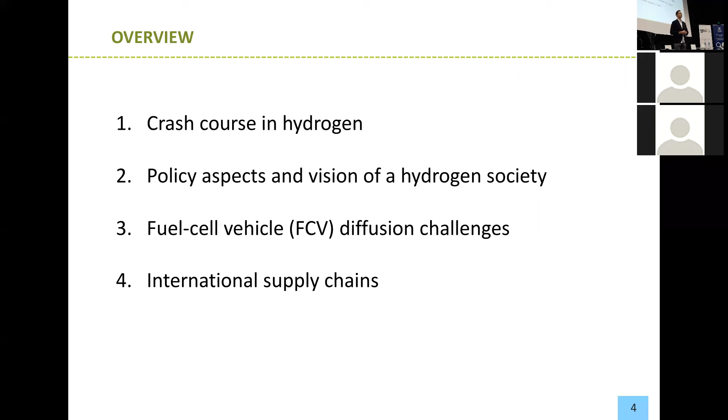So let's get started with the first slide. I'm just going to ask if it's possible for the engineer to maybe look at dimming the front lights, if that's possible.

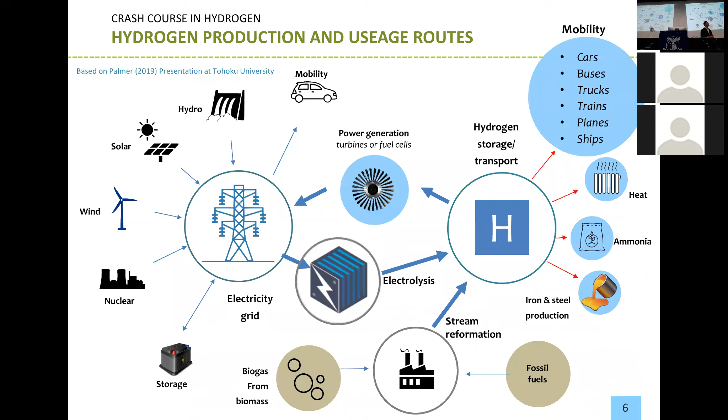There are a lot of countries taking an interest in this topic now. Japan is one of them, but Germany is also a big one really looking at renewables production for hydrogen, and China has also come on board recently. So that's the crash course in hydrogen over.

Let's jump now into the discussion of Japanese energy policy. The first thing to know is that energy policy in Japan is very centralized and very top down. The people who make energy policy are not the Ministry of Environment, but the Ministry of Economy, Trade and Industry. Their foremost interest is to further the development of Japanese industry.

These are government bureaucrats, and they operate basically at arm's length from the Prime Minister. So if the Prime Minister changes in Japan, which it frequently does, that doesn't mean energy policy gets reversed and has to start from zero again. There's a remarkable amount of continuity in Japan regarding the narratives and the actual direction of energy policy.

Because it survived some changes, Prime Minister, it's able to be very continuous. And we also have a very distinctly pro-coal and pro-nuclear flavor to the energy policy in Japan. There are many reasons for that, but that's just how it is for now, without making a judgment on that.

It's also this policy-making environment where the bureaucrats are sort of running the show, and then giving their energy policy to the Prime Minister or the Cabinet, who will typically stamp that. Rarely would there be intervention from a Prime Minister coming in saying, I'm going to bring about a greenhouse gas emissions cut by 50% by the year X, and you are going to make a policy to reflect that. It's not really how it works in Japan.

Also, METI has quite a strong relationship with utilities and with heavy industry. And so that's being blamed for the delay in widespread renewable diffusion in Japan.

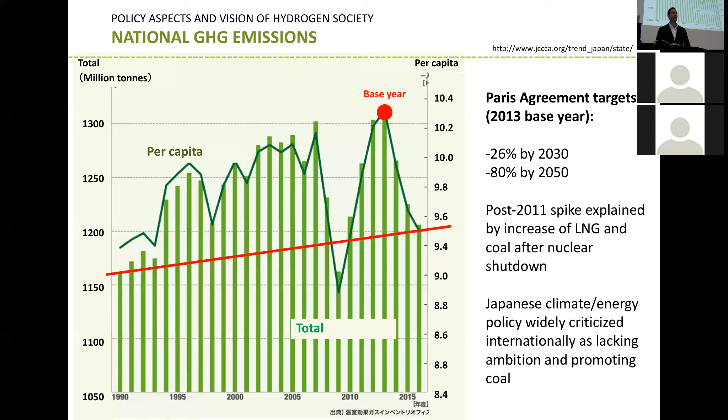But what's happened after Fukushima, all the nuclear got switched off. We've had an increase in coal, which explains the increase in greenhouse gas emissions, and we've had a big increase in liquid natural gas - it's very expensive to import into Japan. We've also had a big explosion in renewables, but that's basically just solar in Japan. We have a big delay in wind, even though Japan, like a lot of countries, has good wind potential.

That's shaped by historical experience, where during the 1970s Japan twice suffered the so-called oil shocks. Their electricity generation was almost 70, 80, 90% coming from oil, and all of a sudden they had difficulties importing oil into Japan, so they weren't able to create electricity. That showed them the problem of depending on one particular region, the Middle East, and one particular fuel source, oil. So their strategy for energy is characterized by diversity.

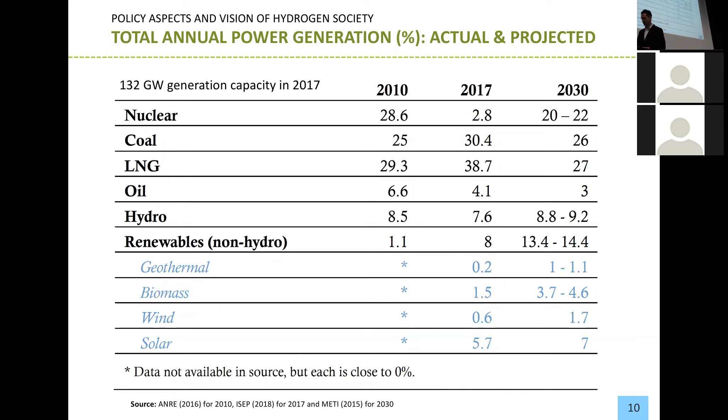First, the idea is to work with existing technologies. That involves fuel cell vehicles, FCVs, and stationary fuel cells, which are basically fuel cells that do cogeneration—they create heat, typically converted to hot water, and they create electricity. These are generally concentrated in the residential sector right now. So phase 1 is to start with these existing technologies to get them out in the market, because selling as many fuel cells as possible helps drive down costs and build up economies of scale. To get these cars out on the road, we also need to create fueling stations.

While this is happening, the second stage is much more ambitious, and this involves R&D—this is where the Latrobe Valley project would fit into all of this. The idea is to start looking at creating lots of hydrogen from overseas resources, mass-produced from cheap resources. And the idea is that when we eventually move into the commercialization phase, around 2030, we use hydrogen not only in the mobility sector but also in the power plant sector.

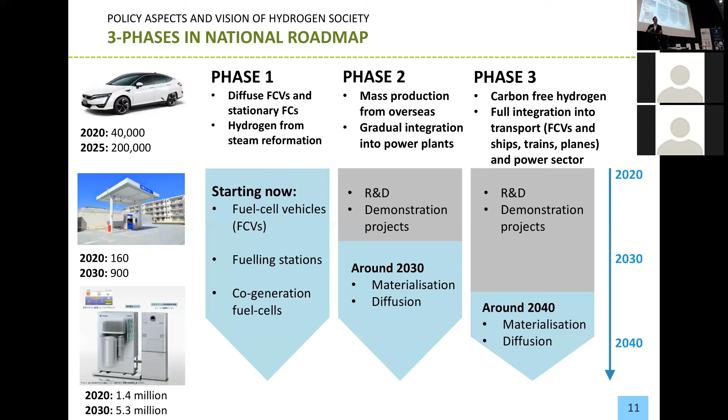So that's the general approach. In phase 3, the idea is to make sure all this hydrogen is carbon-free, which involves, if working with fossil fuels, carbon capture and storage, CCS. Then the idea is to move this hydrogen into not only forklifts, vehicles, and buses, as is the present focus, but increasingly ships, trains, and completely replace natural gas generation in the power sector. These research and development projects have already started, and the Latrobe Valley, to repeat myself, is part of this phase 2 move, with an eye on phase 3, where that Latrobe Valley coal would have CCS and deliver huge amounts of carbon-free hydrogen to Japan.

Now there are some very specific diffusion targets linked to this roadmap. Concentrating just on mobility, for example, the idea is by the time the Olympics are in town, to have 40,000 of these on the road. These are not annual targets, they're cumulative sales. To put it in perspective, there are currently 62 million internal combustion engine vehicles in Japan, which is half the population—basically 1 out of every 2 people has a car.

The idea is to get 40,000 of these on the roads, then move up to 200,000 by 2025, and in the future replace all internal combustion engines with either EVs or hydrogen. This is a very, very ambitious target.

Toyota, with their present Mirai, only has a very limited capacity. They're moving, I think next year, to be able to make about 3,000 per year. But to achieve this target of 40,000 vehicles on the roads is probably not going to be possible.

It's probably overambitious. What's more realistic is actually to have... I'm sorry, don't you really hate it when you make a mistake in front of like 200 people in your slides? This target should read 160 by 2020. So I'm sorry, I'm looking at buses, aren't I? I'm sorry, so this is correct, yes.

So buses are also a part of this, and buses obviously consume much more hydrogen than vehicles ever would. These are already moving onto the roads, and the idea is that, again in the far future, to replace our current bus fleets. Forklifts are also a part of this, but fueling stations really are key to all this. Without a fueling station we can't have fuel cell vehicles, because they have to get their fuel from somewhere. So these are just targets.

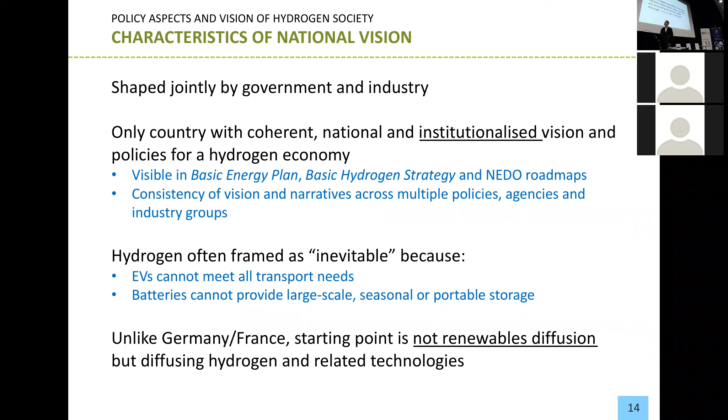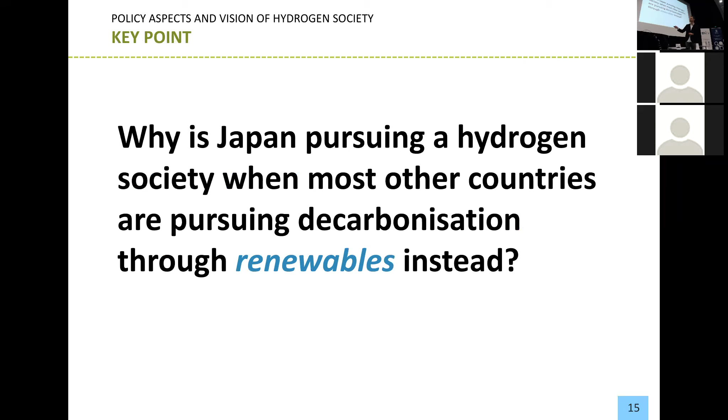Whereas Japan is more so the opposite - we want to get to a hydrogen society, how do we get there? Renewables is one way, but so is fossil fuels. That's a big difference. So a lot of people might be saying, okay, so hydrogen is being pursued in Japan - why are other countries doing hydrogen? And why isn't Japan pursuing decarbonization through renewables, like Germany did in the early stages?

There are lots of reasons for this, but basically Japan's utilities and equipment manufacturers really lack competitiveness in renewables, no matter what sort of propaganda you might hear when you live over there. That's why, for example, Mitsubishi Heavy Industries partnered up with Vestas, the overseas wind experts - that's what they have to do now to compete in the global renewable energy markets.

Japan also has a very long history, starting back from the 1960s and 70s, investing public funds in R&D, in fuel cell development. They've been the world leaders for several decades in terms of the scale of public investment, the sales of technology, and the patents. There's also widespread awareness of export, especially supply chains, international supply chains for hydrogen.

Most importantly - it's difficult to produce evidence for this claim, but I've heard this in many conversations with people all over Japan - Honda, Nissan, and Toyota are very concerned about the shift to EVs, because the problem with EVs, as you know, is it's a game changer. We can have companies in Silicon Valley, companies in China producing EVs that are probably going to be even better quality than our established incumbent car manufacturers. What are these car manufacturers going to do? We have to protect them because, as we know, like all big industries, people's livelihoods and jobs depend on this. So the strategy in Japan has been to really look at hydrogen fuel cell vehicles as being a response to this rising EV market across the world.

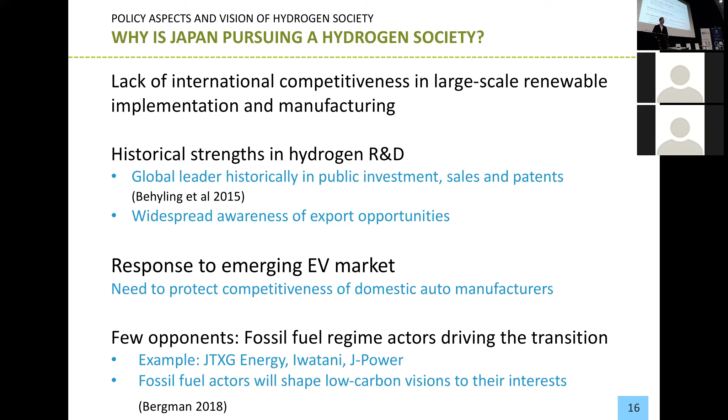And you walk around the suburbs in Japan, you're going to find these Ene-Farms. These are cogeneration fuel cell units on the side of houses. This is taking natural gas and reforming that and creating hydrogen, then putting that into a fuel cell. You have a byproduct of heat, which is used for hot water, and electricity that goes into the house. It's only a very small output - I think it's like 700 watts, 0.7 kilowatts. Very small, but these are there.

One of the reasons is how expensive these buses are - $1 million. I'm not sure how much a conventional bus costs today, I guess even a good bus surely would not be more than $200,000. I don't know, I'm sorry. But a hydrogen fuel cell bus is $1 million, made by Toyota, made by one of the smaller companies. $1 million just sounds crazy. But when I had a conversation with a colleague, she said, Greg, when the fuel cell vehicles first came out, they were $1 million. It's remarkable that the prices have dropped down now to like $50,000. You can now buy a bus for $1 million.

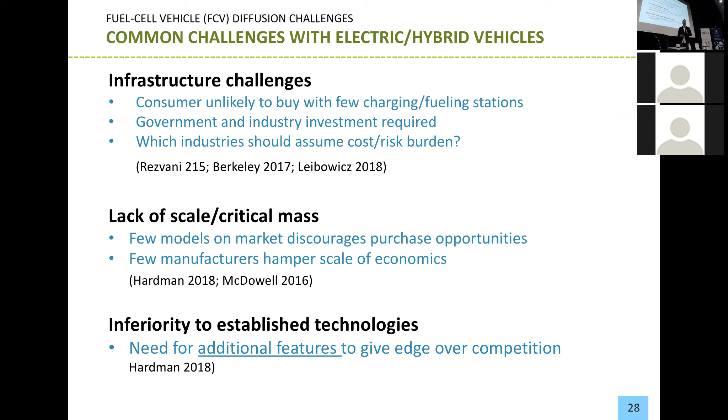So first of all, the idea is that in Japan, they're going to reduce the risks for the infrastructure rollout, for the hydrogen fueling stations, by huge government subsidies. The government's basically going to pay whoever builds a hydrogen fueling station about half of the construction costs. The construction costs are about 5 times the price of a gasoline station.

The idea is that construction costs will be covered, but so would operation costs, because right now all of the 100 fueling stations across the country are basically running at a loss. That's one approach. The other one is to share the risks across the industry.

We have the vehicle manufacturers, Toyota, Nissan, and Honda, who are the car makers, partnering with the fossil fuel companies, which are the people that sell liquid hydrocarbons or gases, and that make the fueling stations. So we're getting a partnership occurring here. What we're doing is having the car manufacturers paying these guys with the government subsidies to build and operate their hydrogen fueling stations. This is the way that risk and economic burdens are shared across industry.

I want to draw your attention here to the fact that these guys really are part of the fossil fuel regime. These are very big names in oil companies, etc.

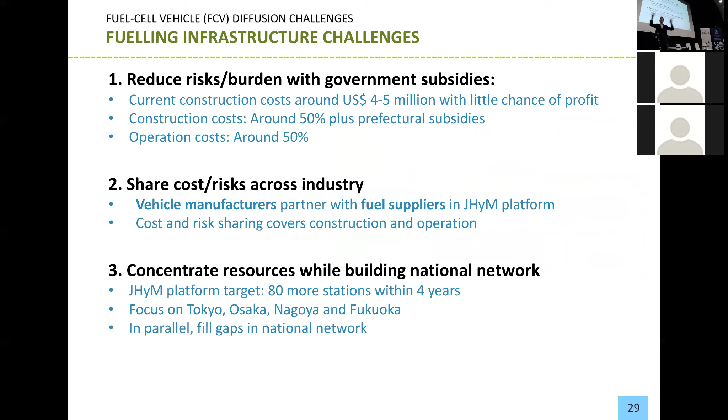The other approach is that we're also looking at concentrating our resources. First of all, we have to get lots of fueling stations out there, but also Germany apparently made a mistake when they were trying to use compressed natural gas vehicles. They put these fueling stations everywhere, evenly all over the country, instead of concentrating them where we expect the users to be.

So Japan's approach has been, yes, we need to get one in every single prefecture in the country, but really we want to concentrate on Tokyo, on Nagoya, because that's close to the Toyota factory, Osaka, and Fukuoka. Right now we've got about 40% of the fueling stations around Tokyo, which makes sense since that's where everyone's concentrated. But also for psychological reasons, the idea is to fill up every single white gap on the map—have a fueling station in every prefecture, whether or not someone's using it.

That's one approach to rolling out infrastructure. Another approach is regarding the critical mass challenge—we need to have lots of people making these vehicles.

Toyota actually opened up their patents and allowed anyone who enters into an agreement with them to use their fuel cell stack, hydrogen tank, and fueling infrastructure patents royalty-free for 5 years. The idea is to entice other car manufacturers to save costs and produce a fuel cell vehicle, bringing it to market both domestically and internationally. Apparently this just copies the approach of Tesla vehicles. This is another approach.

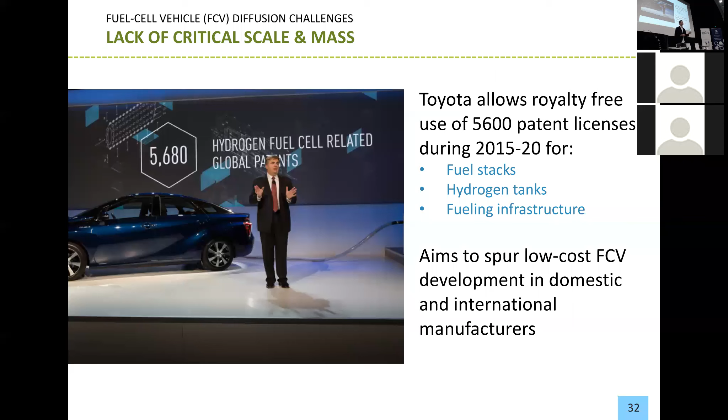Whether or not this has been successful remains to be seen, but everybody's waiting on Nissan to release their fuel cell vehicle, because as you've seen, they're part of these car manufacturers, even though they haven't released it yet, but we have to assume they will.

In terms of mileage, FCVs are by far superior, basically double that of an EV. In theory it's easy to increase—we just have to add more tanks on board, we don't have to add more heavy batteries. The government and industry have already set a target of getting vehicles with 1,000-kilometer range. Why would you need that much? I don't know, but that will be important, especially for trucks, etc.

When it comes to charging time, we know that EVs take a long time, even at turbo. FCVs are just the same as the gasoline fueling-up process.

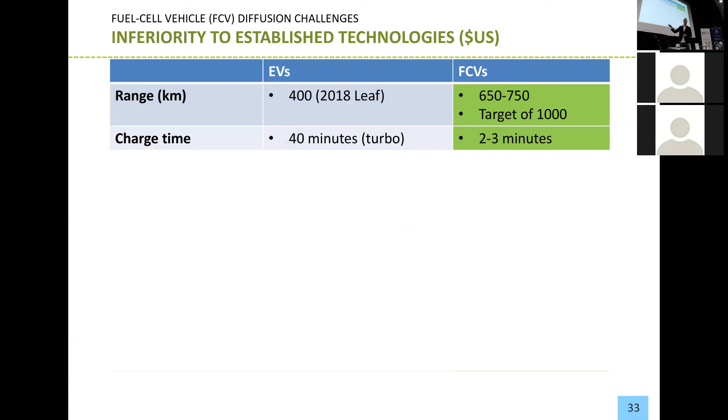And also our fuel costs—we know that right now EVs have an all-you-can-charge plan in Japan that's only about $18 per month, and wherever you go you can get this. So this is the big area where FCVs are actually inferior to EVs.

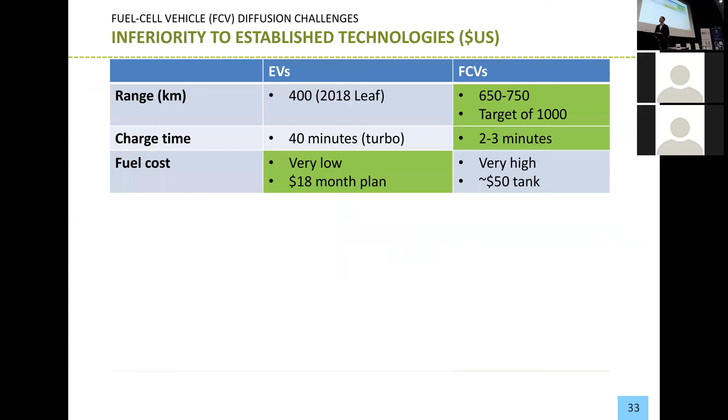This is a really important topic, running costs. For purchase costs, EVs are much cheaper, but actually FCVs are being privileged by the government with a much larger subsidy, and this allows them to catch up there. Home charging, though, is not possible with an FCV—there's a big problem there.

We have the fueling infrastructure. We have 30,000 chargers all across Japan right now, but we don't have that particular numbers for FCVs. That's another big challenge, psychological challenge at least.

And then just another thing is cold weather. So batteries, as you know, are very weak in cold weather, but FCVs actually there's no problem there. And also deterioration. Batteries, like laptops, lithium ion, deteriorate very rapidly, whereas an FCV won't.

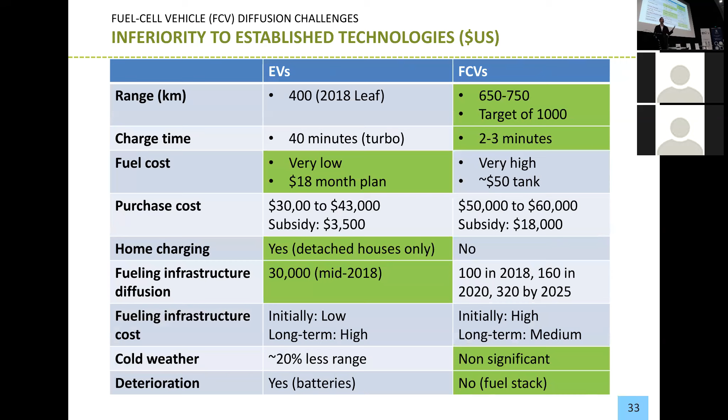So there's kind of strengths and trade-offs, but one thing that Japan's done is actually use this idea of emergency power, electricity. And this is ridiculous, actually. It costs about $10,000 to purchase this additional piece of equipment. But the idea is that if there was a blackout, which is frequent in Japan because of earthquakes, you could, if the tank was full, power your home for a few days, if you had made an investment of $10,000 to back it up.

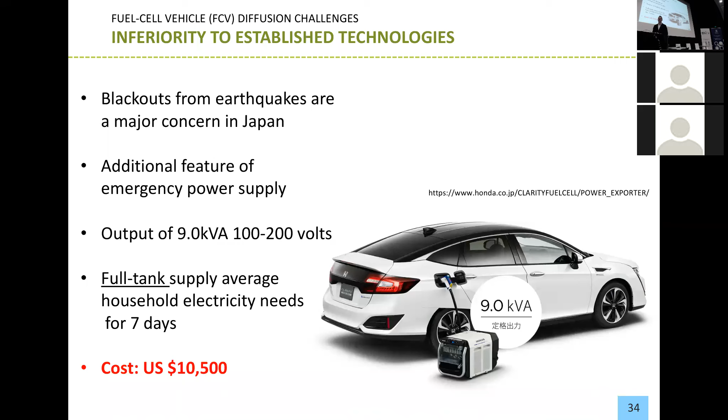So these are just the concluding unresolved challenges for FCVs, which is a really key part of the hydrogen transition: basically the lack of fueling stations and upfront costs is what everyone emphasizes. Everyone's concentrating on addressing these challenges, but actually there are other underemphasized challenges which include the running costs of FCVs and also the inconveniences that would be posed even by having 160 fueling stations.

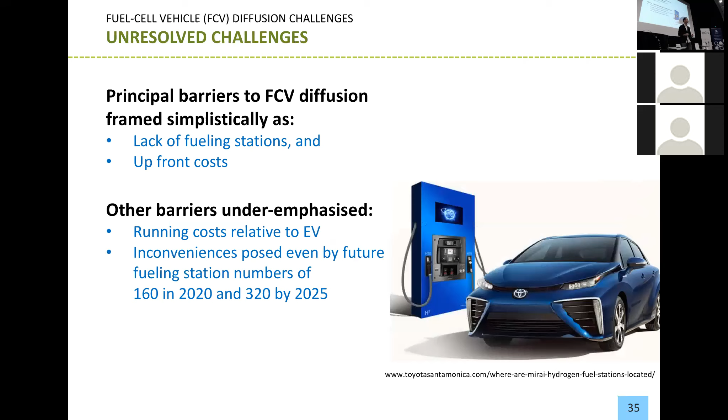So this brings me to the last part of the talk, and I know I've hit time up, so I just have to quickly look over here and negotiate. Do you think it might be possible to get around 5 minutes? Really? Fantastic, thanks very much. So I think this is probably where a lot of the interest in this room is, and I hope I'm not talking too fast for you. I'm getting a pretty dry throat here, but I'm just going to keep soldiering along.

So, international supply chains. I think we might skip this because of time, but by the way, all of my slides, on the very last slide of my presentation, there's going to be a URL. If you're interested in downloading these slides, you can, but please just wait until the end. Everyone will have a chance to download the slides if you're interested. But basically in Japan,

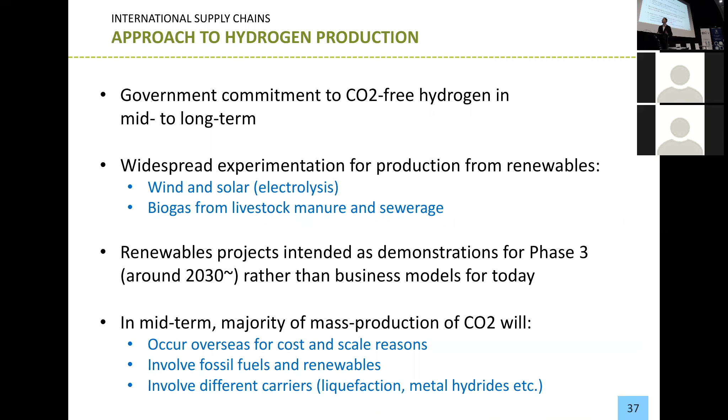there's lots of experimentation occurring right now to produce hydrogen from renewables. I'm just going to showcase very rapidly 3 examples. One is using sewage sludge. There's already a big project in Fukuoka that takes sewage sludge, produces methane gas, biogas, then converts that to hydrogen. Another project does this from livestock.

This is dairy country in Hokkaido in the north, and they take cow manure and cow urine, which is very smelly, and they make biogas, same process, create hydrogen. The other project, which I mentioned, which is in Fukushima, is using electrolysis to make hydrogen.

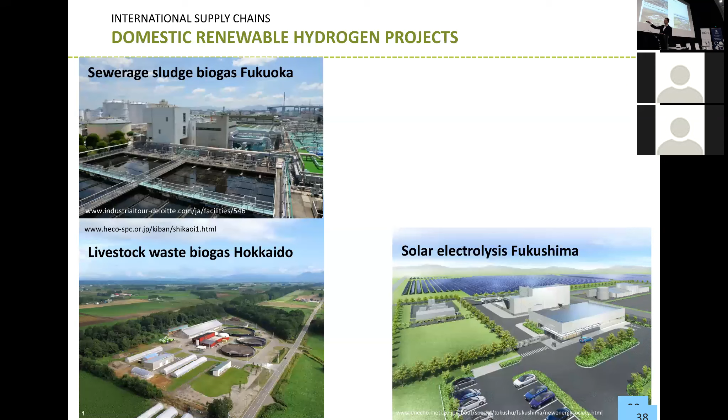Now, this is all kind of nice, but there's lots and lots of challenges to this. For example, renewables are well known to be very expensive in Japan, and these resources are very far from the cities, except for sewage, which is located in urban centers. The production, everyone knows it's technically possible, but the problem is that the demand for hydrogen today is low. So even though this is the ideal, in the future we want to have domestic renewable sources producing hydrogen, the idea is this is expensive.

It just makes more sense, for example, to use electricity as electricity, or to use methane gas from a biodigester as methane gas instead of converting it to hydrogen, especially when there's low demand today. So it's technically possible, but not really economically possible.

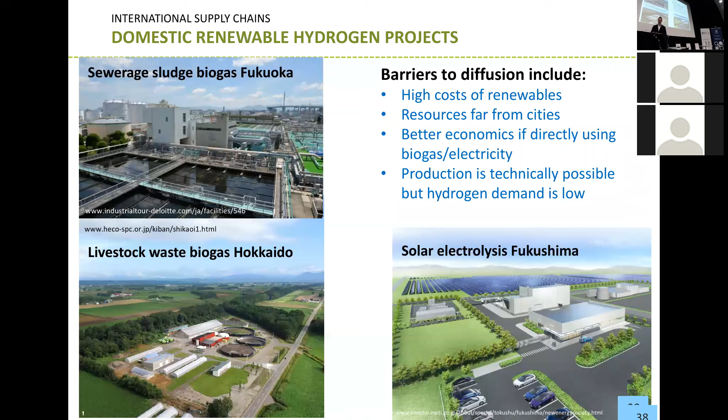So Japan's approach is to build international supply chains in the midterm. Australia's the topic of one of these. But I just want to point out to everyone that not only is Latrobe Valley the topic of much interest for Japan, actually Brunei, this little country off the edge of Malaysia, who also has these fossil fuel reserves, is actually the target of a very similar project.

And actually they're looking at using a different carrier, so not liquefaction, but actually using organic hydride to transport hydrogen to Japan. And just like Latrobe Valley, they're also looking at creating a pilot project, beginning with about 210 tons in 2020. There are very different companies involved: we have Chiyoda Corporation, involved together with Mitsubishi Corporation and Mitsui Corporation. These are fossil fuel players, these two guys.

And then it's very similar to over here. We've got some fossil fuel companies here involved in the Latrobe Valley project. But the Latrobe Valley project, just to put it in context for you all, isn't the only fossil fuel supply chain under investigation right now.

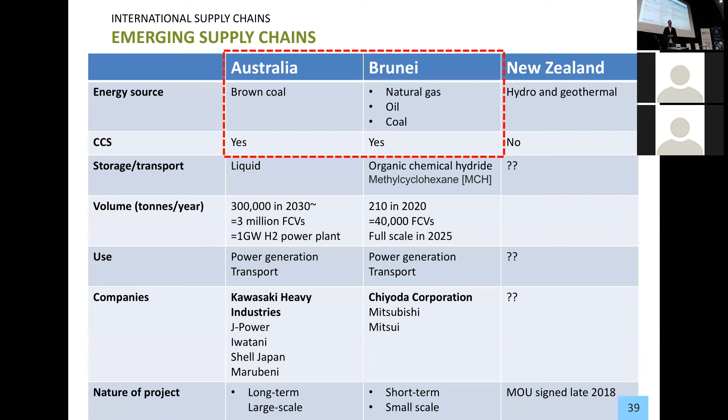We have this Brunei one, and also at the same time, apparently Japan has just entered into an MOU with New Zealand because they have lots of geothermal and hydroelectricity resources that could be used to create carbon-free hydrogen. So there's just a little map here which shows you the thinking that's actually going on right now.

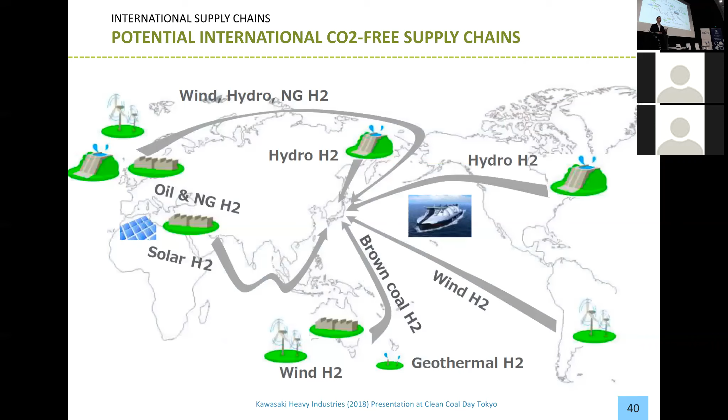So the idea is, as far as Kawasaki wants to see this, they want to see lots of international supply chains built because they build the ships to go with this. They can make lots of money by getting lots of these supply chains built.

So I'm sure most of you are familiar with this, but the idea in Victoria is to take the very cheap, accessible brown coal and convert that to hydrogen via gasification first, and then to put that on this specially purpose-built tanker, which would carry it in a liquefied state to Japan.

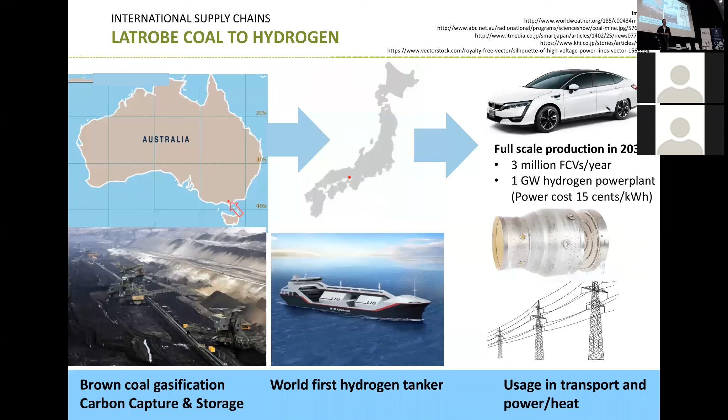And not only would that be used for transport, the idea is to bring it into the power plant sector, as I keep explaining, because the power plant sector has the potential to create a huge demand for hydrogen and to lower the costs for the FCVs. The idea is to create a synergy here.

So Kawasaki Heavy Industries argued that to achieve the same sort of level of output in the future, we have to be looking at creating a 3 gigawatt solar array. There are very few of these in the world, by the way.

So a lot of people are skeptical of the carbon capture and storage, right? And a lot of people are thinking, so far there's no real projects in the world that use CCS for climate mitigation purposes. Why would we expect to see this happen in Latrobe Valley? People are worried that it's going to go ahead without CCS.

And the pilot project will go ahead without CCS, based on my understanding. So if CCS is incorporated into Latrobe Valley, that would be when the project is commercialized, if it's commercialized, which there's no decision on yet.

But I want to make a point about this. First of all, the CCS costs, according to Kawasaki Heavy Industries, only make up about 10% of the costs. They've got a target of trying to get about 30 yen per cubic meter of hydrogen. This is a 2030 kind of target. It's roughly comparable with natural gas.

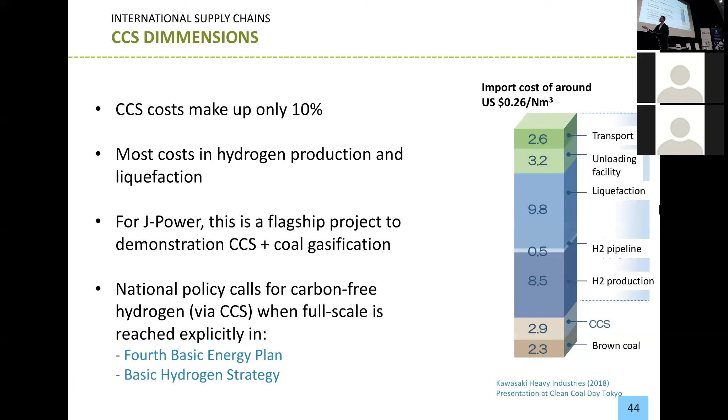There's also a great Australian researcher working out of Kyushu University who's made a very detailed analysis of the cost considerations of the Latrobe Valley project and compared it to renewables. He's come to the conclusion that today, coal would be much cheaper, even with CCS, for producing large amounts of hydrogen. But in the future, that's going to be challenged by declining costs in renewables.

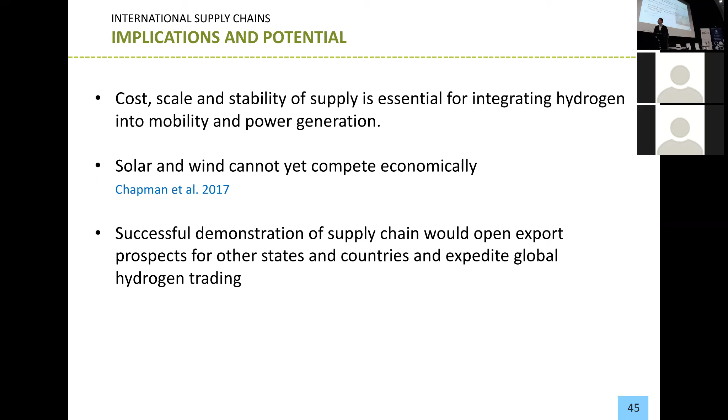So I went to the Latrobe Valley, just came back this morning, and had a few conversations down there. I met with some residents. Not everyone in the Latrobe Valley is super excited about this project, because the Latrobe Valley is an area that's been subject to environmental pollution for decades because of the coal industry.

So we've got some residents down there who are very concerned about the environmental impacts, even of a pilot project. Their concerns, first of all—I haven't been able to verify if this is true or not—is their claim that there hasn't been an environmental impact assessment on this project because it's a pilot project. They're also concerned about air pollution from the coal gasification and any waste left over in the process, because the raw ingredient is still brown coal.

They're also concerned that if this project was commercialized in the future, that would invigorate the coal industry, the coal extraction and mining, and open the door to other coal fires in the future. So that was another of their concerns. They're arguing, do we accept jobs over health? I'm not saying these arguments are scientifically founded, but this is the reaction of some part of the community, apparently. This probably represents challenges to the project organizers, and there's been claims that community consultations haven't been sufficient so far.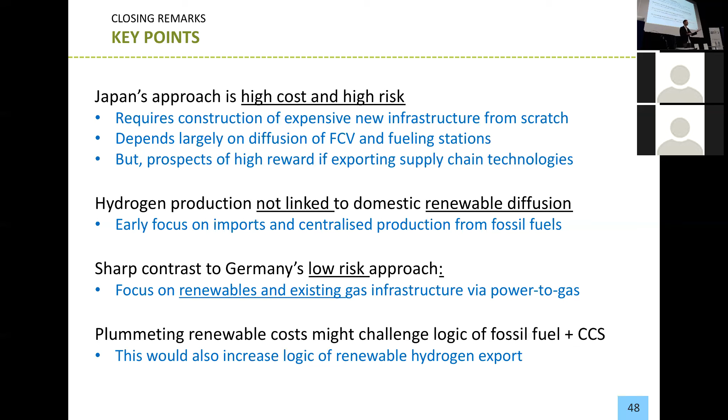So those are my key points, and I guess some of you might be interested in learning more about this. I've put up a few key documents there.

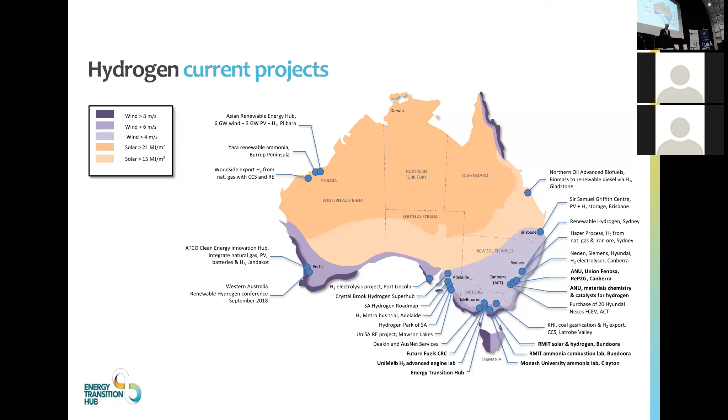Key thing about this is that all of these energy resources can ultimately be used to produce hydrogen, either by thermo processes or via electrolysis. So once you can produce electricity from any of these, you can then produce hydrogen. And there's also potential synergies - for example, Australia has expertise and trading relationships with LNG, and this would work quite nicely with hydrogen supply chains.

So look, I just wanted to give you a quick overview, and these slides will be available afterwards. And I'll pass you over to Leo, who'll talk a little bit more about Latrobe Valley. That's going to be something.

Cool. It's easy. Good evening.